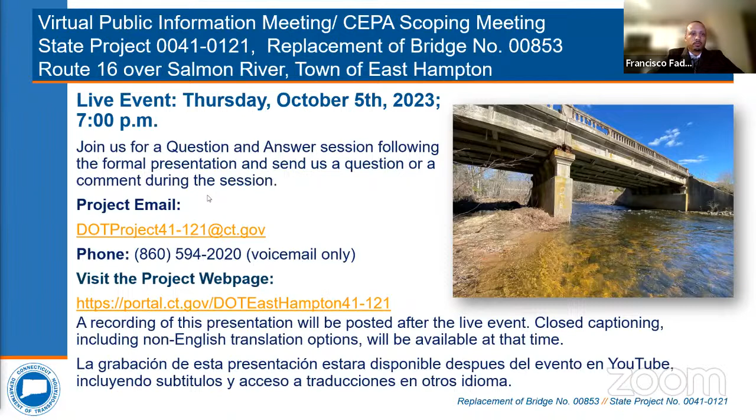My name is Francisco Fadul, and I'm a transportation supervising engineer with the Connecticut Department of Transportation for this project. We hope that everyone finds this presentation informative and that we'll be able to address any questions or concerns that you may have. I would like to thank the town manager, David Cox, for cooperating with our team back in August to discuss this project and to help tonight's meeting happen.

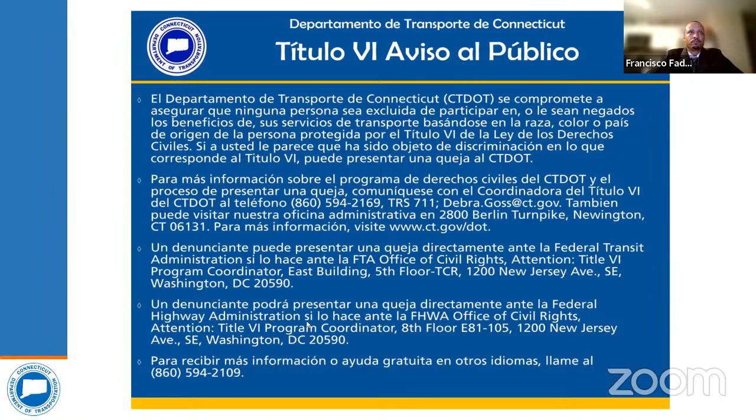All right, thanks, Francisco. Hi, everybody. First, I just want to thank you all for attending tonight and showing interest in the project. My name is Kevin Fleming, and I'm a transportation planner here at DOT in the Office of Environmental Planning.

As mentioned, we're here tonight for a joint public informational and CEPA scoping meeting. But what does that mean exactly? The Connecticut Environmental Policy Act, or CEPA for short, provides a public process for all the various Connecticut state agencies to follow in order to identify and review any action that may have an adverse effect on the environment. This process also allows us to evaluate any alternatives that may either avoid or minimize any potential impacts caused by the project.

And because CEPA is a public process, a really important component of it is your opportunity to review a project and give us feedback. So your comments here tonight, and throughout the entire public comment period, which closes on October 19th, are a really critical part of the overall CEPA process. I certainly encourage anyone to submit comments that you may have.

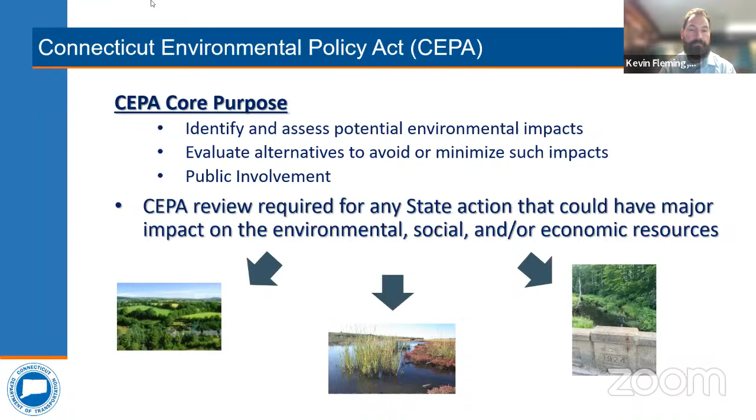Actually, in the case of this particular project, since it involves federal funding through the Federal Highway Administration, we also have to ensure compliance with the National Environmental Policy Act, or NEPA. Basically, this means that we have to review these types of resources through a federal lens to make sure federal requirements are met, in addition to our state regulations under CEPA.

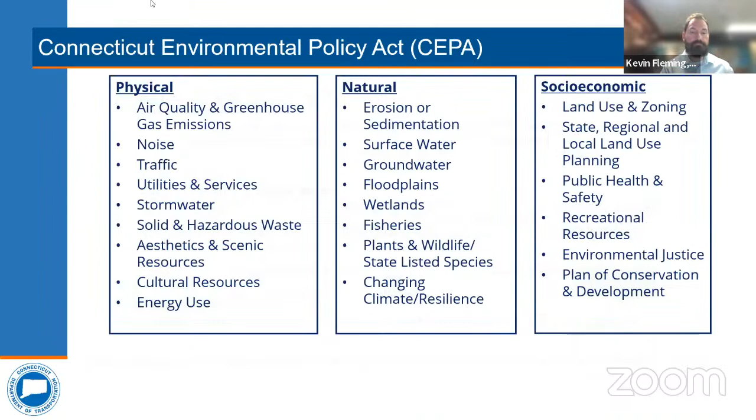So basically what that says, it's a way for us to get information from the public and all the other state agencies so we can determine the proper level of analysis and environmental documentation needed for a project. Certainly we want to make sure our analysis and documentation is commensurate with the level of environmental impact.

This process kicks off when we publish a notice of the project in the Environmental Monitor, and that begins a minimum 30-day public comment period. For those of you who are not familiar with what the Environmental Monitor is, it's an online publication run by the Connecticut Council on Environmental Quality, and it informs the public of all the various state projects that go through the CEPA process. It's a bit of a CEPA clearinghouse of sorts.

For this project, the scoping notice appeared in the Environmental Monitor on September 19th, and the comment period will run until the close of business on October 19th.

As I mentioned, scoping can not only help us identify any potential alternatives, but it also can help identify any specific environmental resources that need to be analyzed in the project area. Now, obviously, as you know, often the local community has a really unique understanding of the project area, including an awareness of any community concerns, issues, or potential controversies that we just might not be aware of. So this gives us a really good chance to feel the pulse of the community.

Well, thank you, Kevin. Good evening. My name is Brian Chamberlain, and I am the project manager for the design of this project. I'll spend a few minutes describing our proposed replacement structure and some of the details involved with the construction.

As previously discussed, the primary purpose and need for this project is the replacement of Bridge 00853, which carries Route 16 over the Salmon River in the town of East Hampton. This will address the structural deficiencies and provide a structure that accommodates safe travel for facility users.

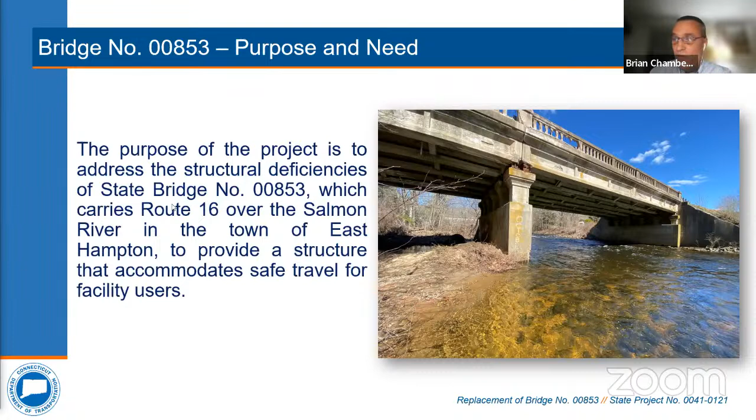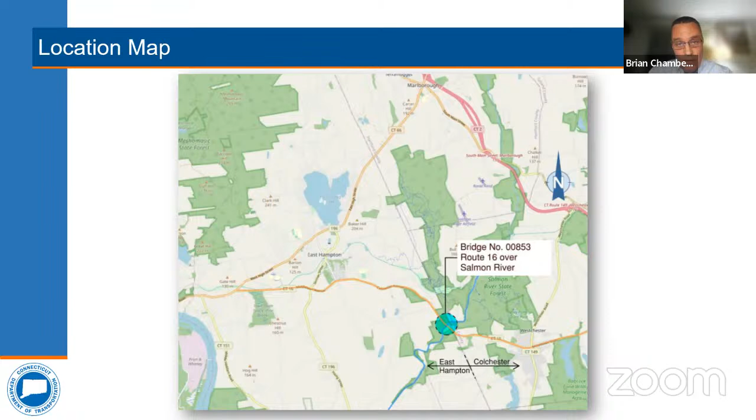And the project location is shown here, and I realize this is a fairly high-level view. The key detail is that Route 16 crosses the Salmon River in East Hampton, close to Colchester. The main thing I'd like you to take from this slide is the proximity of the project to the East Hampton-Colchester town line.

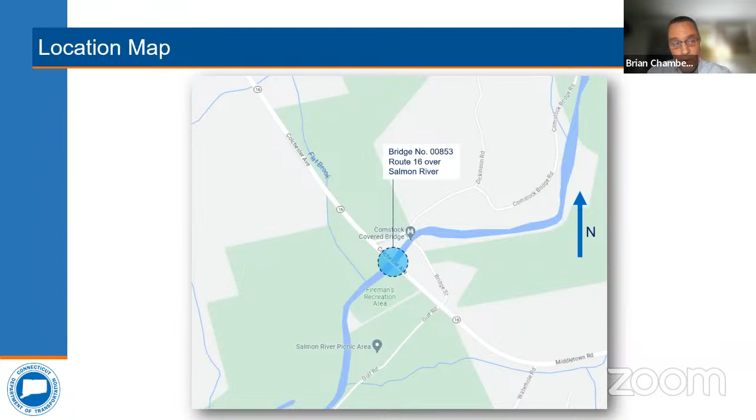Now here's a closer view of the project location. The bridge is just north of the Gulf Road Bridge Street intersection, close to Comstock Bridge Road, which leads to the Comstock Covered Bridge. This road also leads to a public parking area and access to the Salmon River hiking trail.

Now, before we get to the technical portion of the presentation, I wanted to provide some definitions of the major structural elements on a bridge and an explanation of the numerical condition rating system assigned to the major elements.

Now, the parapets, deck, and beams are what make up the superstructure of a bridge. The abutments and wing walls are the end supports of the bridge. Intermediate supports, if there are any, are called piers. Together, the piers, abutments, and wing walls are known as the substructure of the bridge. The substructure supports the superstructure and helps to transmit loads from the superstructure down to the bridge foundations.

The existing bridge superstructure consists of concrete encased steel beams with a concrete deck and bituminous concrete wearing surface. The parapets are concrete with architectural detailing to improve its appearance, which we'll discuss in more detail later in this presentation. You'll notice also that the roadway approaches from both directions are relatively straight. There are no roadway curves through the project limits.

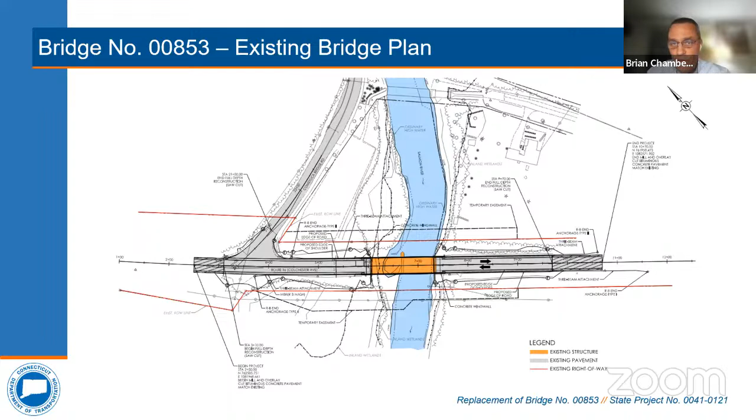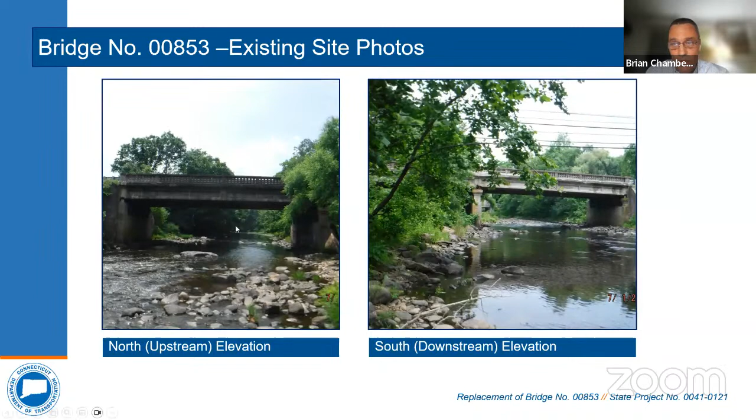These next two photos illustrate the bridge roadway approaches from both directions. As previously mentioned, the approaches are relatively straight as you come to and cross the bridge.

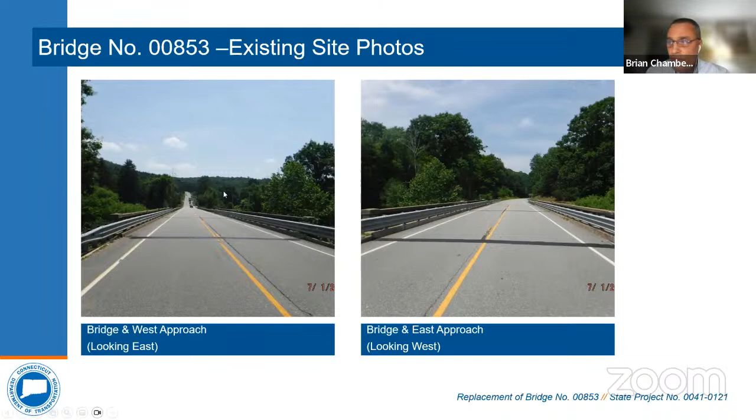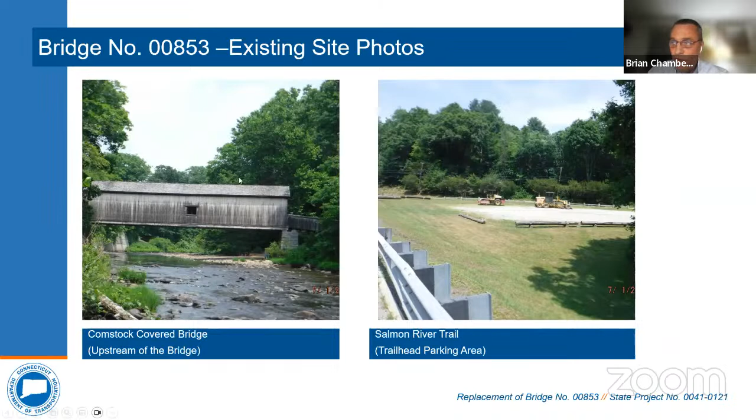As we've said, the site is close to the Comstock Covered Bridge. There's a recreational parking area also close by. We do not expect any direct impacts to parking access as a result of the proposed construction. Our construction sequence is set up to ensure there will be no long-term obstructions. It's possible that an isolated construction activity might cause a very short duration conflict, but nothing is anticipated that would reduce or remove parking lot capacity during the replacement of this bridge.

At the beginning of my presentation, I noted that the need for this project comes from observed structural deficiencies. Let me be clear, the bridge is currently safe. When I talk about the bridge condition, I'm showing things that, if left unaddressed, would lead to an unsafe condition in the future. We're doing this work now so we never reach that point.

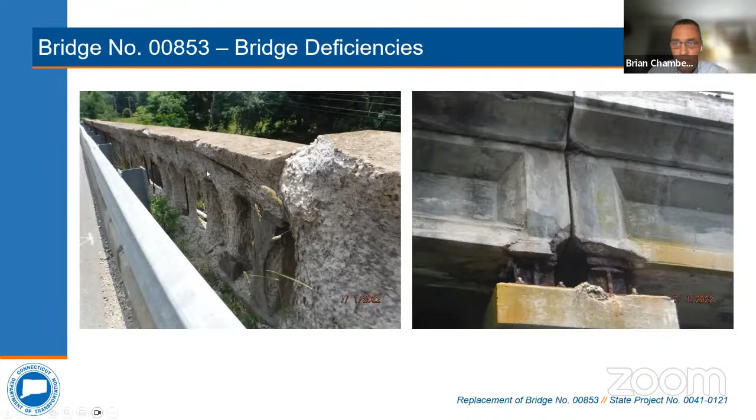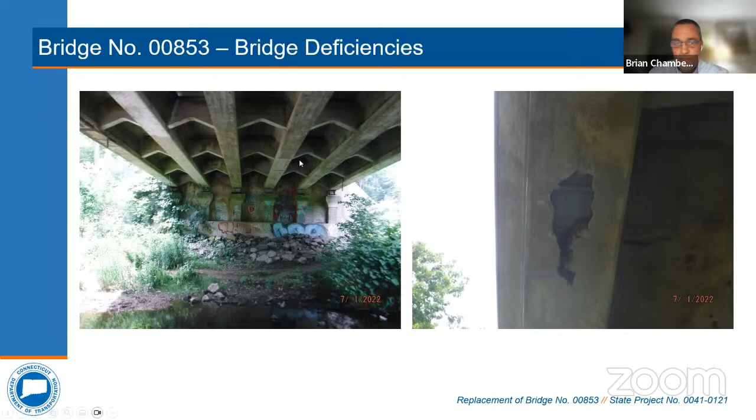This next slide shows the total project limits. The proposed structure is represented by the orange shaded area. What we've proposed is a new 152-foot single-span bridge, two approach slabs, one at either end, and wing walls to support the roadway slopes as we tie into existing grade. I'll discuss the structure in more detail in later slides.

The project will also involve the reconstruction of the approach roadways both before and after the bridge. The total length of reconstruction will be 820 feet, including approximately 325 feet west of the bridge and approximately 307 feet to the east. We'll begin and end the roadway construction with milling and overlay to connect the proposed roadway surface to the existing.

The proposed roadway alignment will be similar to the existing. The horizontal alignment will be maintained; we aren't changing the way the road is laid out. It'll still be straight at the end of the project. However, the vertical profile will be raised just a little, about 1.25 feet, to maintain the existing hydraulic opening for the river underneath. All of the highway geometry has been designed to meet current DOT standards for length of curve, stopping sight distance, and grades.

There's a few other things I'd like to point out before we leave this slide. You'll notice some areas of brown and green along the edges of the walls and roadways. This represents areas of cuts, which is the brown, or fill, the green. As we've noted, the design is still in very early stages, and I strongly suspect the final grading will be slightly different than what's shown here. However, I wanted to make everyone aware that some regrading will be taking place.

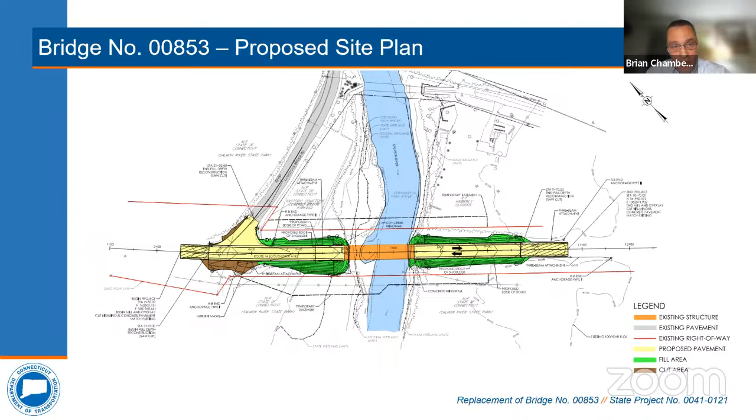The final important detail concerns Comstock Bridge Road and the parking area nearby. We will need to reconstruct the roadway at the intersection where it ties into the new road, but access will be maintained throughout construction. Obviously, going through a construction zone can be a challenge sometimes, but it will be possible to get through.

Now here we see the proposed roadway section through the project. As I mentioned, the new roadway will approximately match the existing. We will provide two full-width 12-foot travel lanes and two full-width 4-foot shoulders. This matches current design standards and will provide safe width for vehicles.

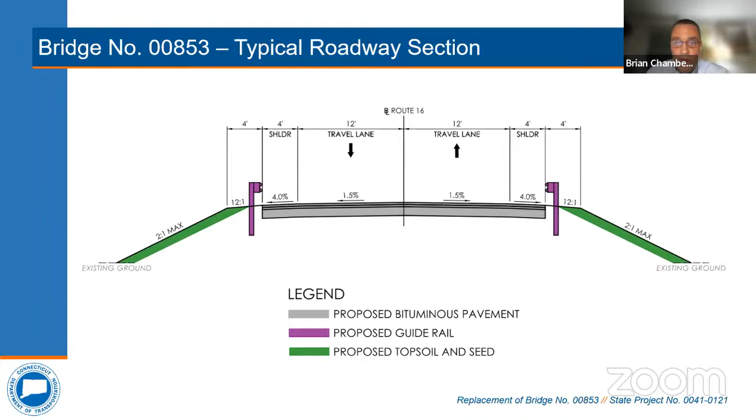Now here we see the typical cross-section of the structure. Our proposed bridge will consist of a cast-in-place concrete deck with steel girders. It will pave the roadway with bituminous concrete. The roadway cross-section here will naturally match the approaches. We provide 2 12-foot lanes and 2 4-foot shoulders.

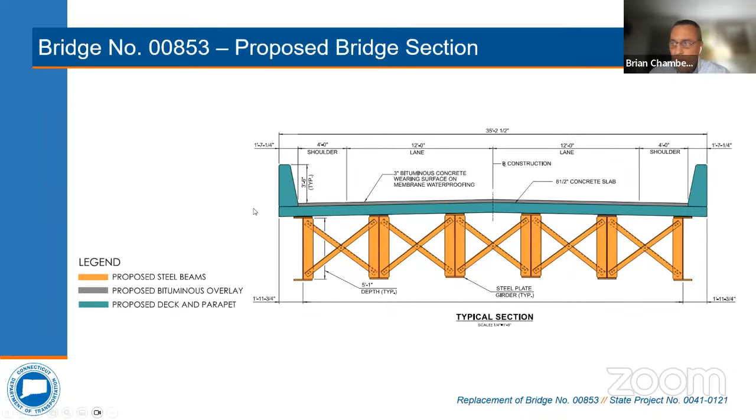Here's a slightly more detailed view of the proposed structure, and I'll point out a few key features. As mentioned earlier, the superstructure is supported by abutments. Our abutments here will be cast-in-place concrete sections supported by steel H-piles. The deck will consist of cast-in-place concrete and a bituminous concrete overlay.

The wing walls extend back on either side of the roadway and support the roadway slopes. The wing walls are all conventional concrete walls. We also plan to leave a portion of the existing bridge substructure in place, with the grading extending back from there. By doing this, we'll be able to minimize the area of disturbance.

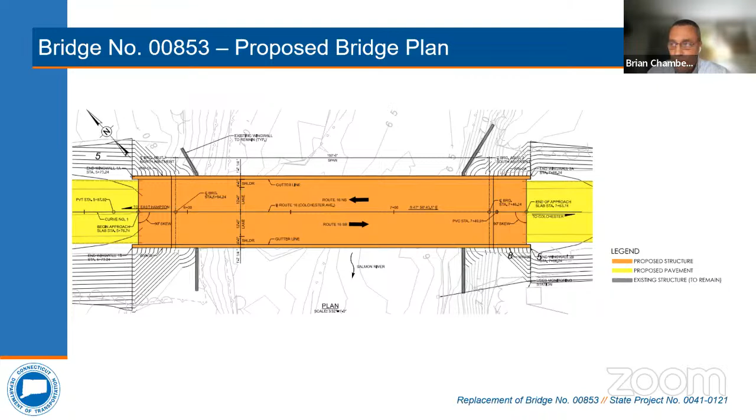I'll spend just a few minutes discussing the elevation view of the proposed structure. As you'll note, this is a single span bridge crossing the river without needing any mid-span support. The existing pier will be removed. As we mentioned earlier, we do plan to leave a portion of the existing abutments and substructure in place.

The new abutments will be supported by steel H-piles, and the wing walls run back along both ends to support the roadway grades. One of the details I'd like to bring up is the new bridge parapet. We are planning to incorporate some sort of architectural system to match the existing structure's appearance as much as possible.

In the lower right-hand corner, we're showing a sample of one approved system. We are still very early in the design process, and some of the details are still being worked out, but the plan for the parapets is to use something similar to what we see here.

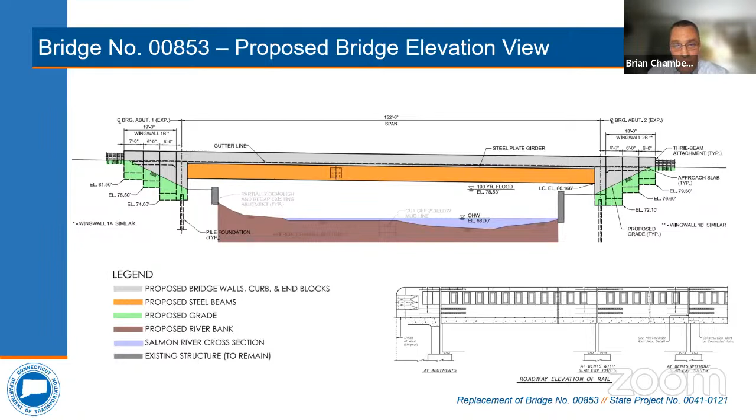I'd like to close my portion of the presentation by spending a few minutes describing the plans for construction. We do expect that the work will require 2 construction seasons. Our proposed construction setup is shown in the following slides.

The construction will be done in 2 stages, with each stage allowing a single lane of alternating one-way traffic across the bridge. Traffic will be controlled by temporary signals installed at either end. This drawing is not the final design detail, and the signal locations shown are approximate.

I just want to be clear that the signal at the left side of this slide will be set up to control traffic from both the main road and traffic on Comstock Bridge Road. The other traffic signal at the right of this slide will only need to control traffic on Route 16.

I realize this will be a bit inconvenient, but we felt there was no feasible alternative. We took a look at a detour, but the proposed route is approximately 18 miles long.

The first stage of construction will begin with the removal of one half of the existing structure and building the first half of the proposed structure. We show a section view in the bottom right corner.

Half of the existing structure will remain in place while the new portion is being built, and traffic will pass over this section of the bridge. At the same time, we'll be reconstructing the corresponding section of the approach roadways, shown here in yellow.

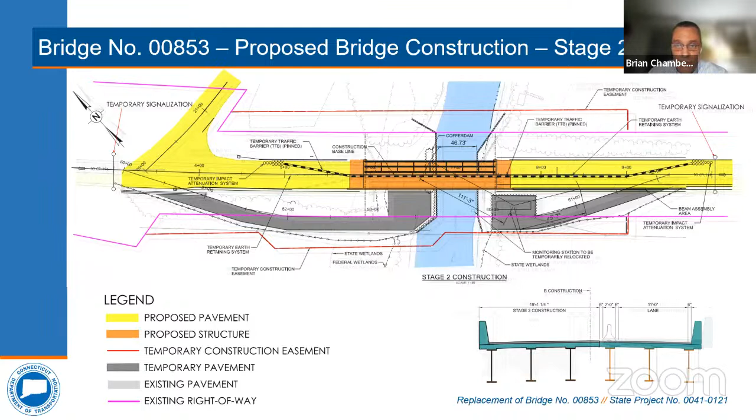My final slide looks at possible expected right-of-way impacts. The purple areas represent temporary construction easements for the contractor's possible use. We expect that the majority of construction activities will take place south of the bridge. We are proposing temporary access roads at either end of the bridge to give the contractor access to the substructure.

Both roads are planned for the south side. We also anticipate acquiring a construction easement to the north, just in case something comes up that requires access from that side. We realize most recreational activities are taking place to the north and plan to avoid interference as much as possible, but with a project of this scale, it's best to plan for the unexpected. Again, no long-term impact to the parking area is planned.

At this point, I'd like to hand off to Matt to continue the presentation.

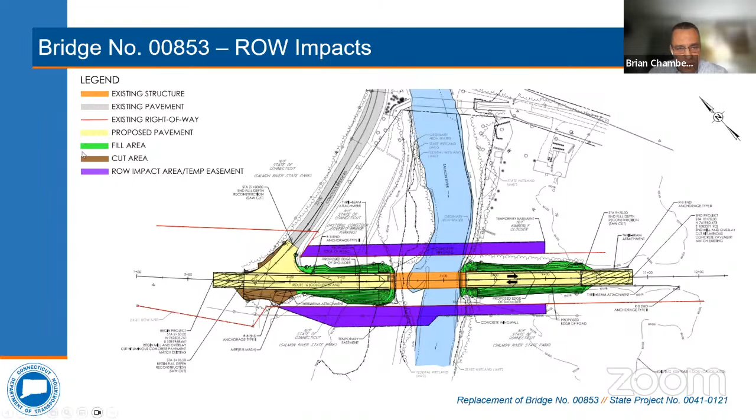As Brian also alluded to, we're still early on in the design process, so what you saw on that screen may change a little as the design moves forward. Many property rights that end up being required will be acquired in accordance with Connecticut General Statutes sections 13A-73, 13A-98E, and whenever there is federal money used in any phase of a project, the department must adhere to what is known as the Uniform Act.

Once the design has progressed to the point where we know exactly the limits of the easements needed, and we're ready to begin the right-of-way acquisition process, each affected property owner will receive a letter of intent to acquire from our office along with a property map depicting the exact rights to be acquired. At that point, we'll determine the fair market value of those rights, and that is used to establish an offer of just compensation. That offer is sent to the property owner in writing, and a right-of-way agent from our office is available to meet with the owner to explain in detail the project, the particular impacts to the owner's property, and how the state developed the offer.

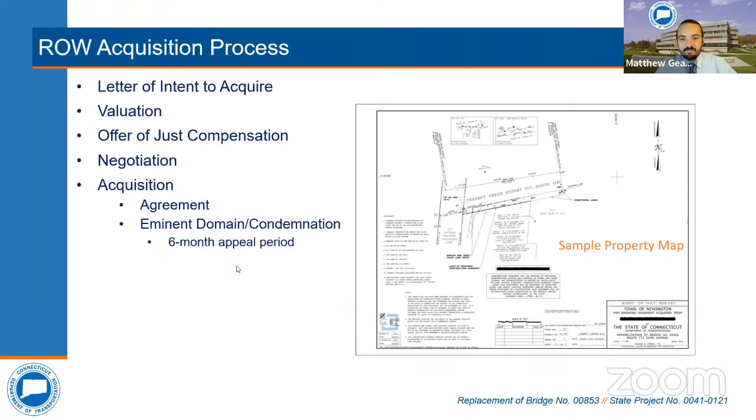No matter how the temporary easements were acquired, following completion of the project, the department files an affidavit on the land records that extinguishes the easements, and all rights revert back to the original owner. I'll be here to answer questions during the Q&A portion of tonight's meeting, but in the meantime, I'm going to hand it back to Brian to conclude the presentation.

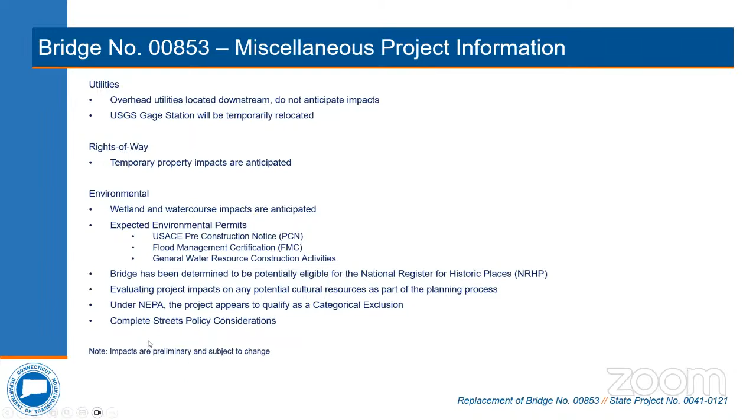Thanks, Matt. The additional items we'd like to note are related to utilities, rights-of-way, and environmental impacts. Please note that these impacts presented here are preliminary and subject to change as design progresses. Overhead utilities are located on the downstream side of the bridge. At this time, there are no anticipated impacts to those. There is a USGS gauge station on the southeast corner of the bridge that will need to be temporarily relocated. As previously mentioned, there will be temporary property impacts associated with this project.

Wetlands and watercourse impacts are anticipated for the construction of access roads, support of the excavation, and handling water operations. It is anticipated that an Army Corps pre-construction notification, or PCN, and a DEEP general permit for water resource construction activities will be required.

The bridge has been determined to be potentially eligible for the NRHP, National Register of Historic Places, and we will be evaluating project impacts on any other potential cultural resources as part of the planning process. Under NEPA, the National Environmental Policy Act, the project appears to qualify as a categorical exclusion due to its minimal environmental impacts.